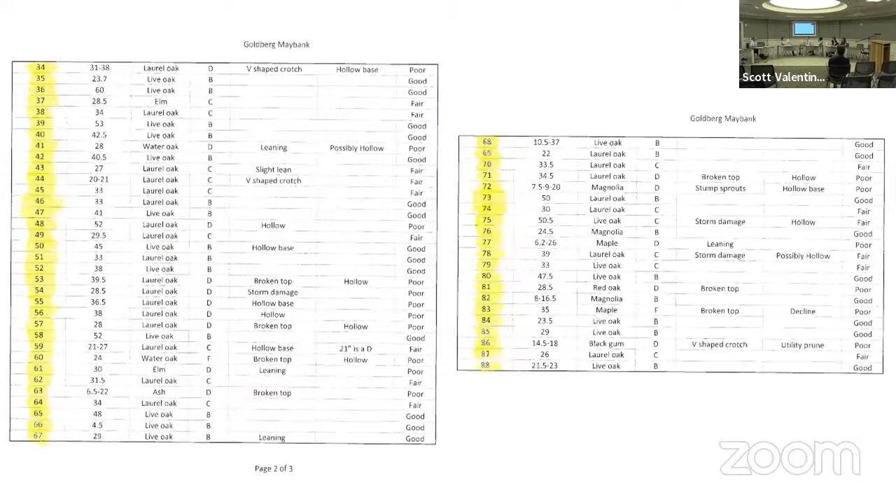So staff recommends approval with the condition to plant 31 caliper inches of canopy trees on the site. Must have a certified arborist submit a tree preservation plan for the protected grand trees to be preserved, and must have a certified arborist implement the tree protection or preservation plan.

Must use 4-foot chain link fence. There's some out there on site already for the road construction, but additional fencing will be needed in 4-foot chain link fence.

Materials must develop the tree save areas into appropriate groomed landscape areas. They're going to be open space now, not remaining natural. They can go into those areas and then provide a landscape, and that open space plan should go to both DRB and TRC for review and approval. Excellent, Eric, thank you.

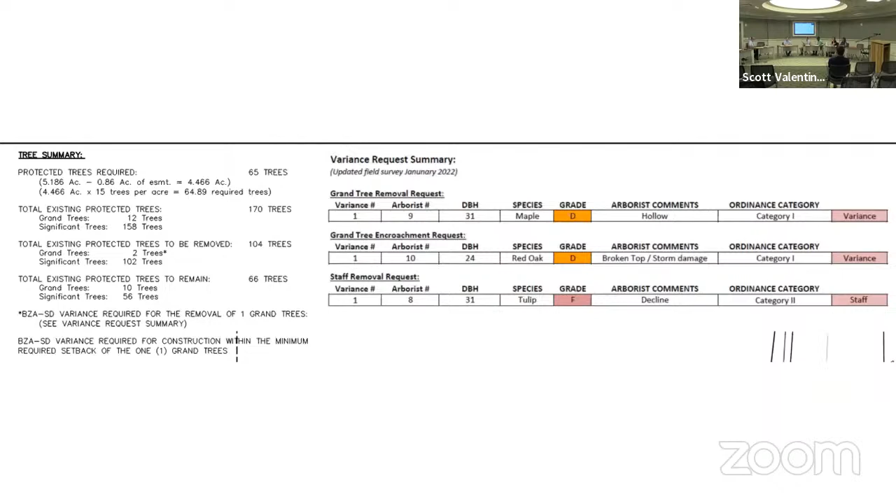Sure, I'm Amy Jacob with HLI, 29A Lineback Drive, Charleston, South Carolina.

Thank you. We deferred from last month's meeting, and as Eric said, we went and restudied the plan and resurveyed the canopy trees, two large canopy trees out along Maybank Highway. In doing that, we reduced the building footprints out of the canopy area in order to give that space, creating a larger green space, open space in that area.

At the same time, we took out two buildings that were in this back area and along this area. What that allowed us to do is shift the parking down and save one of the grand trees, which is the one we're asking for, just a minor encroachment of the curbing. It also allowed us to save more of the protected trees along the property line, which helped bring us back up above the 15 trees per acre.

At the same time, we reduced the parking count from more of an industry standard of 4.5 parking spaces per 1,000, and we're moving to 4 parking spaces per 1,000 square feet, which is the minimum written into the code. There are some other areas we studied, like pulling the parking lot back in this area and saving a group of trees, which again helped us get back above the 15 trees per acre.

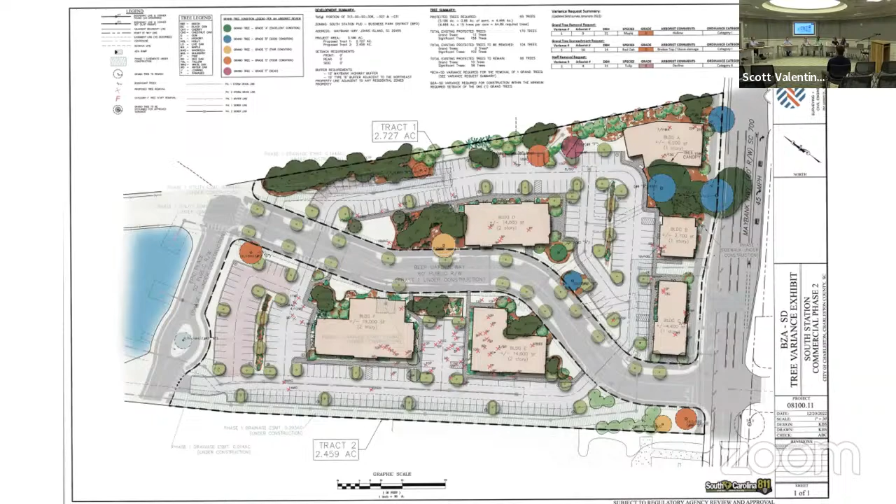I'll start by saying I think it's a great example of city staff and applicant working together, because these plans are significantly different, and ultimately the one we're reviewing today is going to be a much better fit design for that parcel. So great job. And my eye looks at those trees, and I think that's for Jennifer.

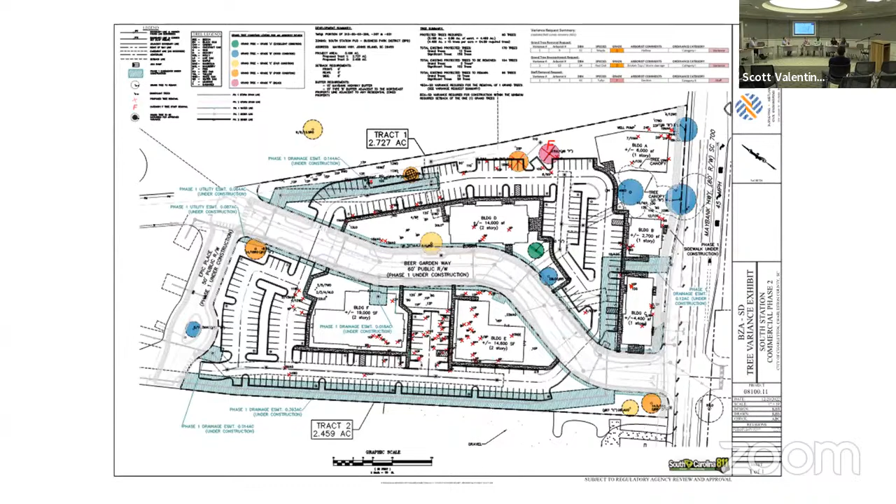I'm curious about the tree she mentioned, the minor encroachment for curbing, what that looks like today. That's the red oak, was it?

Yep, red oak. As you can see in the far right photo, there was a break out of the upper crown, and there's like a stub, which I would hope that we could just have the arborist prune out and kind of restore the canopy.

And in the middle photo, the silt fence is around the back property line and on the plan, so the curb is basically right on the front of that chain link fence. It just doesn't quite meet the full distance.

Do we have any pictures of the root area? I do not. That would tell the rest of the story of the tree. Are you concerned that the roots are up out of the ground? No, I just want to see that it's healthy, because it's graded a D.

And so if the roots and ground are healthy, I would feel better about the encroachment.

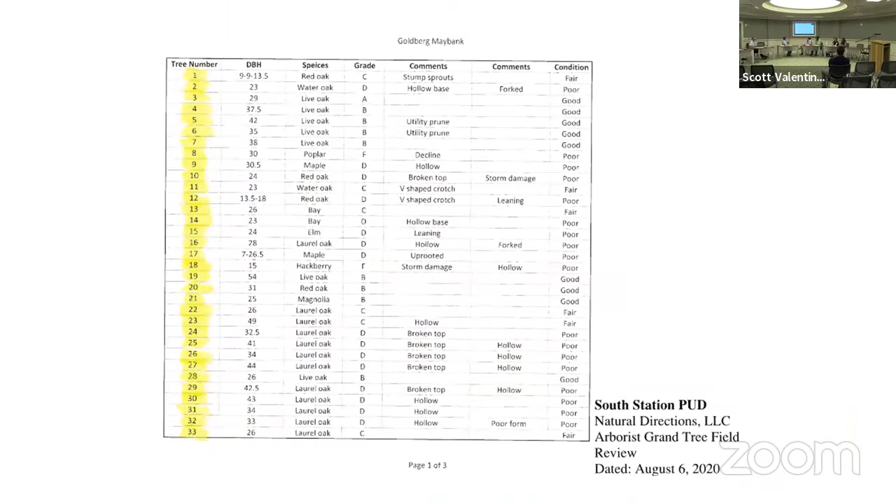How much fill is being run into the road? The road is currently under construction, so as far as the parking lot area we're looking at, we're now studying it. Now that we've opened up this area, we're looking at changing some of the slope and bringing it down, so hopefully we can start to reduce some of that, since that existing elevation is lower than what is being proposed, so we'll lower some of the elevation within the parking lot.

So along with the curb being constructed, there's also a raise in grade at the base of the tree. But in the drive aisle, yeah, in this area over here. Can you point on the plan to what tree we're talking about? This is the tree that's being encroached.

And so with the drive aisle, we have fixed entrances here and here, so in order to get circulation of the building, we have to connect. In doing so, we removed that building and pulled this down in order to save that tree, where our initial proposal was asking to remove it.

And so the curbing that goes there probably needs a small short retaining wall as far away from the tree on the back of the curb, in order to keep the elevation and not promote grading through there.

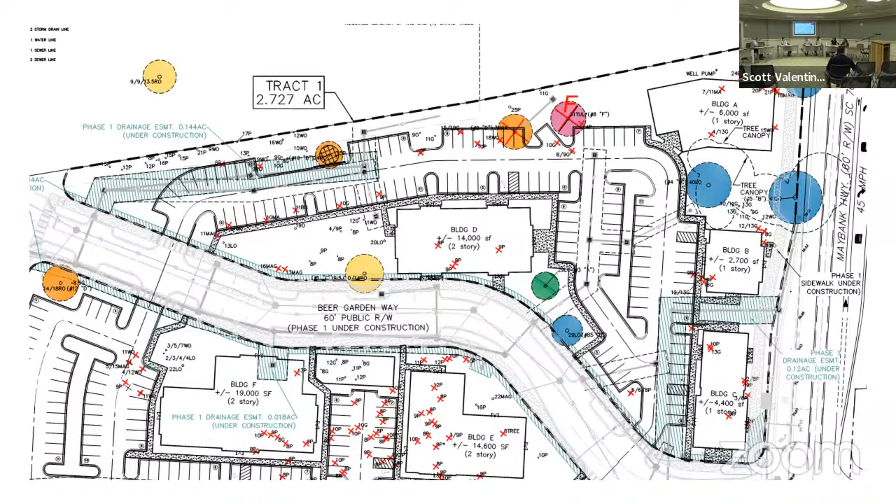The motion, if there's no questions. Make a motion for approval of staff recommendation. I second that motion. All right, so Paula, seconded by Jennifer. All in favor of the motion? Aye. In favor, any opposed? So it's approved. Thank you for your time. Thank you. Approved by. Good. Five zero.

All right, so the next one is, moving along, item D1, for 411 Meeting Street. TMS number is 45909031114. Zoned MU-2. Request for the first 1-year extension of a vested right that expired on 2/3/23, pursuant to section 54-962. Vested right pertains to variances granted under section 54-327 on 2/3/21 to allow the removal of protected and grand trees.

Yep, so this is 411 Meeting Street. Some of you weren't on the board at the time. Obviously 2 years ago they made the application, with that date creeping up on them in January, but it wasn't in time to make the February meeting. So we said that's okay to make that, and they pay the fee. They're asking for a 1-year extension with interest rates and building materials the way they are. The project is moving along. Matter of fact, I believe there's maybe a subsequent development plan approval that would vest this a little further, but they just wanted to be cautious.

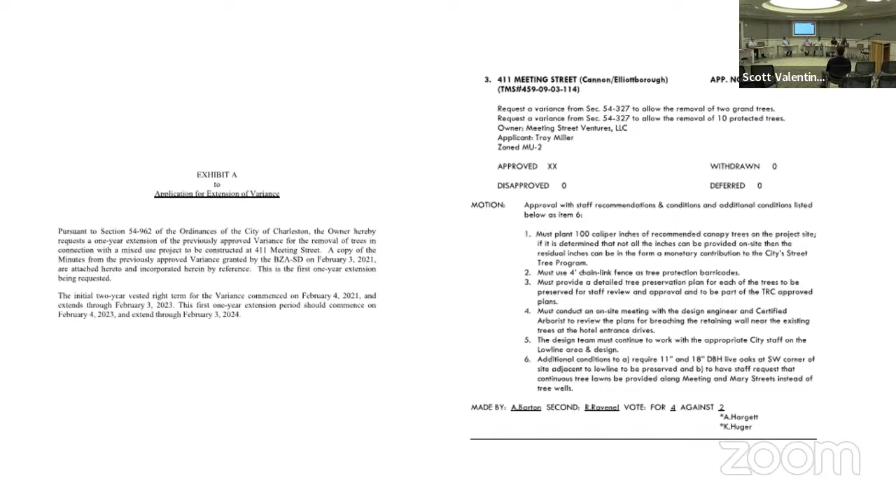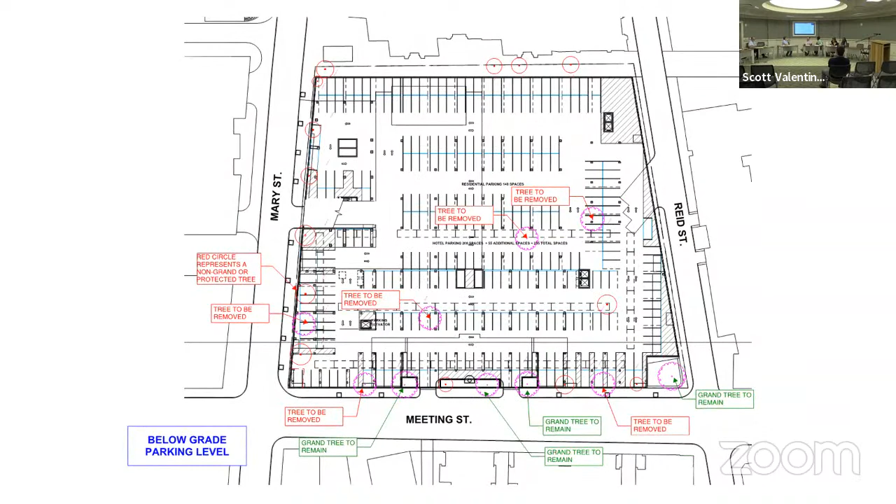The attorney for the ownership group is here. This is the application, this is the exhibit for the extension, as you can see there. Conditions would carry over. The Meeting Street property, zoned MU2, aerial. This is a hotel, conference, residential mixed-use project. This was the city's exhibit we used to clarify, because there was a previous approval and then it came back for additional trees.

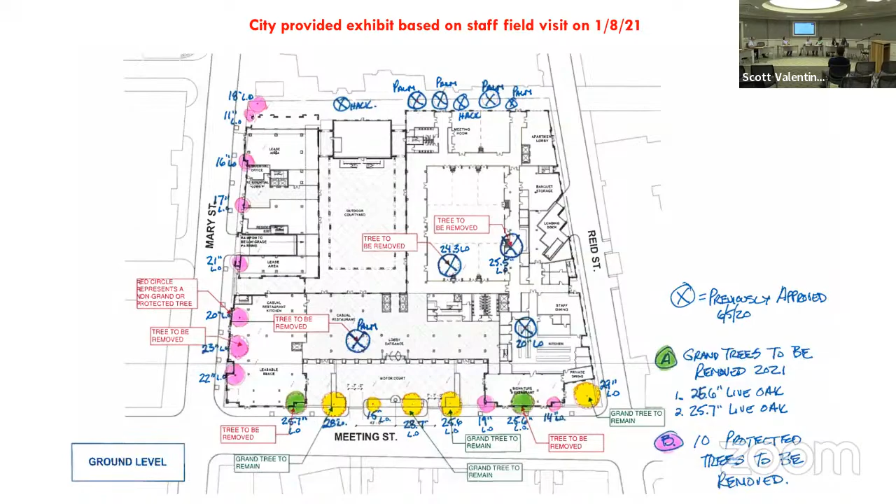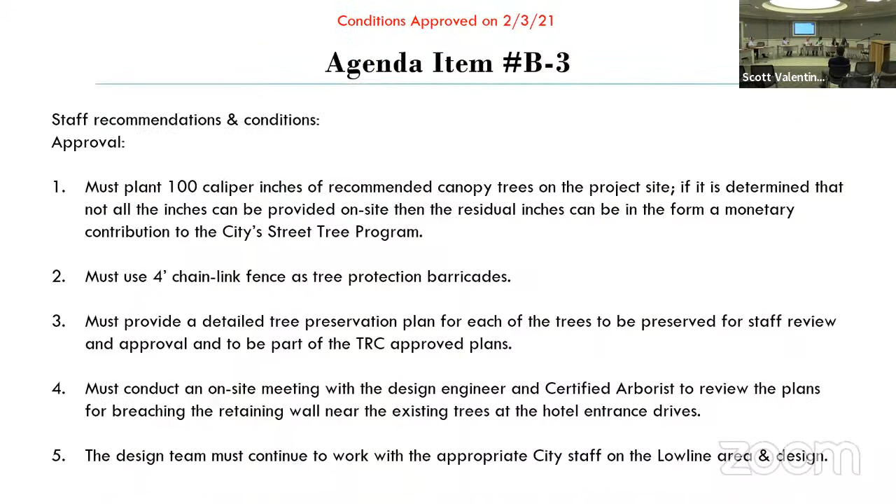The rules have changed. These are the conditions. Staff recommends approval for the 1-year extension. All right, staff is ready. Do you want to stay and talk or mention anything?

I'm James Wilson with Home Fundings at 5 Exchange Street, here on behalf of the applicant, and I'm just here to ask questions in terms of the project moving forward. Planning is to hopefully pull the building permit relatively soon, certainly this year. So we want to make sure that we have this extended, and as Mr. Schultz said, I think we'll probably find a new way under TRC approval, but this is just the intro.

All right, thank you. Anybody else present that wants to be heard in favor? Anybody present that's opposed? Close the application to the public, field to the board. Any discussion? Remember this. Reason to go back and change the decision. Don't see any reason why we wouldn't grant the approval. I remember it very well. I concur.

I have a motion. All right, it's a motion for approval by Calvin, I'll second. Second by Jennifer. All in favor? Aye. In favor, any opposed? It's approved, 5-0. Thank you. Thank you, and sorry, Paul.

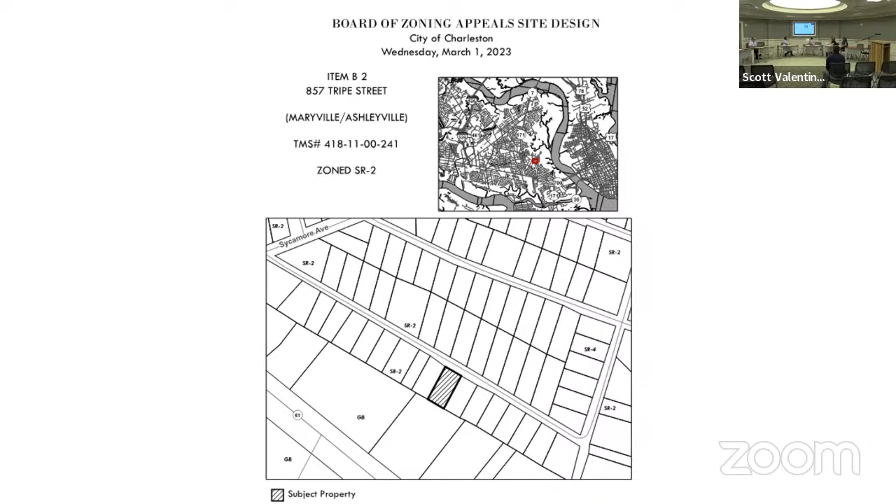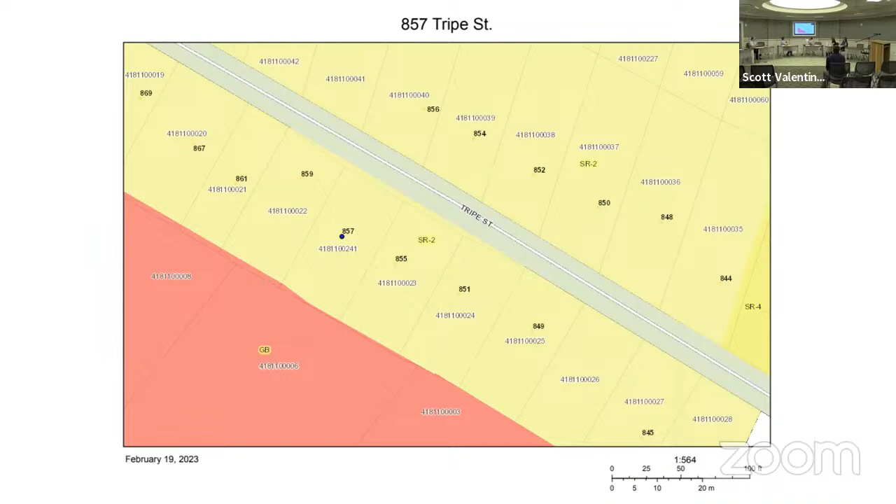So SR2 has similar setbacks as SR1: 25 front, 25 rear, 9 on the sides. See today, I think it was probably a side yard of 8.5 at one point, but not existing now, and I think they pulled the garden and their fence off of that property. You can kind of see that it looked like it might have been used. So it is a water oak, it's starting to break apart, and I'll point out a few issues that I saw, but it is basically inside a couple feet of the rear 25-foot rear setback.

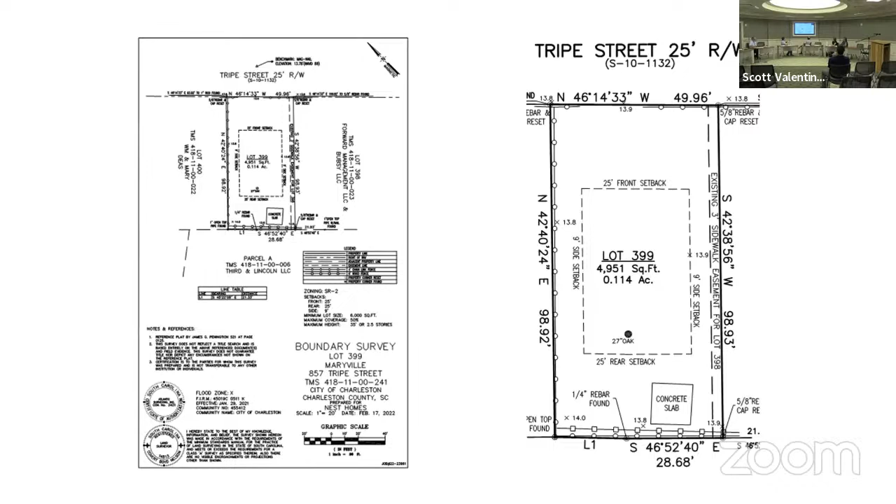So here's your plat, the full boundary survey, and then I blew up the 27-inch oak on the back side there. So pretty much in what you think is the building footprint or envelope. This house, meeting the front, has a little notch for the front porch, and then just a couple feet off the rear for the patio.

National Directions went out and looked at it, 27.5 inch water oak. They gave it a C grade, fair condition.

You can see some branches that have died and fallen out of the tree. Sorry for the light, but there's some damage in the canopy. And then we start to look at the trunk and start to see some what appears to be some cavities, some sort of wound, whether it got struck by lightning or something. They're kind of running down the face of that side of the trunk. And then, of course, you've got some callus wood that developed over some kind of wound at the base.

I don't know if it's starting to, that wrought iron, I think there might have been like a little circular bench around the tree at one time or something that's starting to go off with wrought iron.

But with that said, again, fact-finding function, must plant 13.5 caliper inches of trees on the house site in the form of 2.5-inch trees. I think we can plant one in the front yard, plant one in the backyard, and then the residual inches in the form of 3 trees at 2.95 as a contribution to the city street tree program, and provide a landscape plan for staff review and approval.

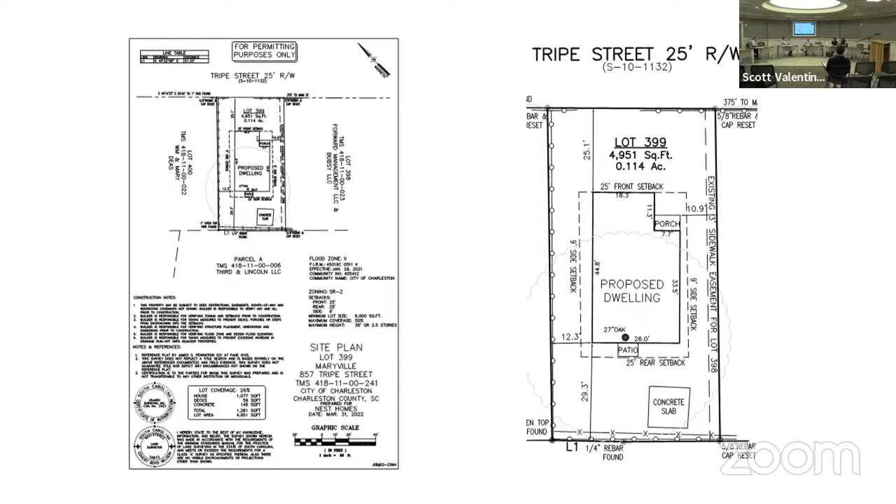It certainly sounded like there were holes. Yeah, so I think it would be a nice thing to plant some new trees with the building of the house.

Questions from the applicant? Any other comments?

So we'll go to item B3. Oh, some water break there.

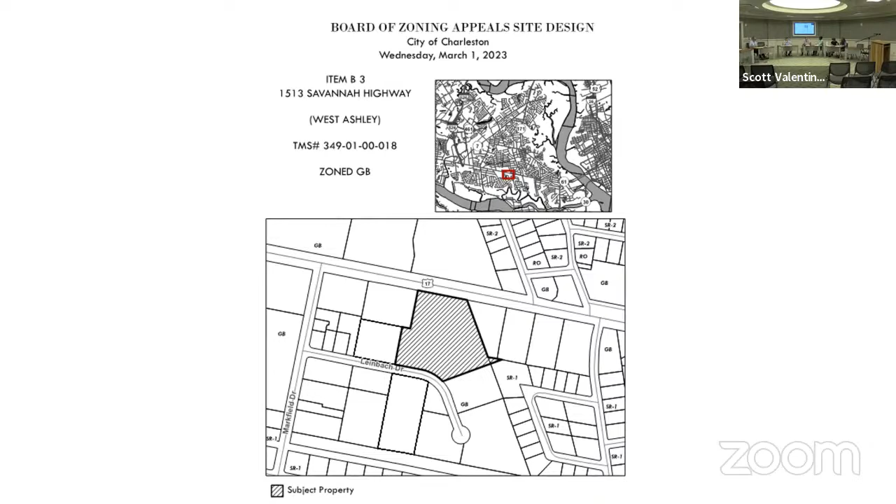Right, so item B3 is 1513 Savannah Highway, TMS number 349010018, zoned GB. Request a variance from section 54-327 to omit the 15 protected trees per acre requirement. So this is the application submitted by Fordberg Engineering on behalf of the Baker Motor Ownership Group. Grounds for a variance. This property does stretch from Savannah Highway to Leinbach Drive.

So focus on the big building. You've got Mercedes and Infiniti showrooms out front, and then a lot of back-of-house operations, the service, repair, car wash. And I believe the Rover West Ashley building will at some point be demolished. But they need to move forward. It's for the two dealerships, and that involves some changes.

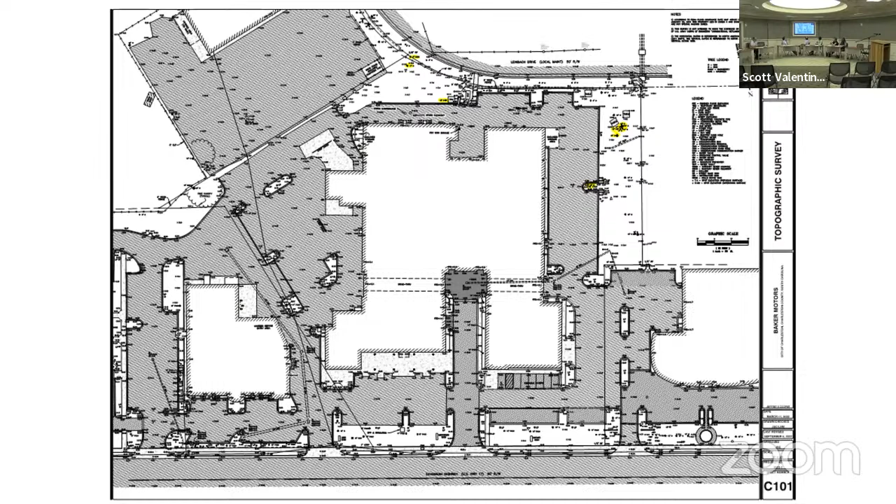So this is your existing conditions layout. You can just barely pick up the property line, but it's kind of like that wedge, if you will, with the flat front on Savannah Highway. Note that where a couple of the yellow dots are, top right, is a green space with a detention area. And it seems that we're seeing more often that dealership real estate is very valuable, and they need every square inch for employee parking, inventory parking, operational type things. So that's existing conditions. So this would be the demolition plan.

They're taking off the front Mercedes building and reorganizing it to have a drive-through service, or porte cochere, if you will. I'll let the applicant speak to that, and then they need to add a car wash and some other elements. So that's the new front, the new drive-through porte cochere, if you will.

You see a freestanding car wash top right, and reconfiguring some parking and a new driveway out to Leinbach, a better organized driveway compared to what they have now. They have to drive through to the other building to the north, very planned. You can see a portion of it, there's a driveway there. So the new curb cut.

So we have a few protected trees, I believe 14 in total, and I'll zoom in on those. We've got 3 where the curb cut is going to be built, and 1 near an existing transformer. And then the others are in that kind of open space where there's a little bit of a detention area, far right.

Again, here's the site plan, proposed landscape. So we'll plug in trees per the interior parking lot requirements and so on and so forth.

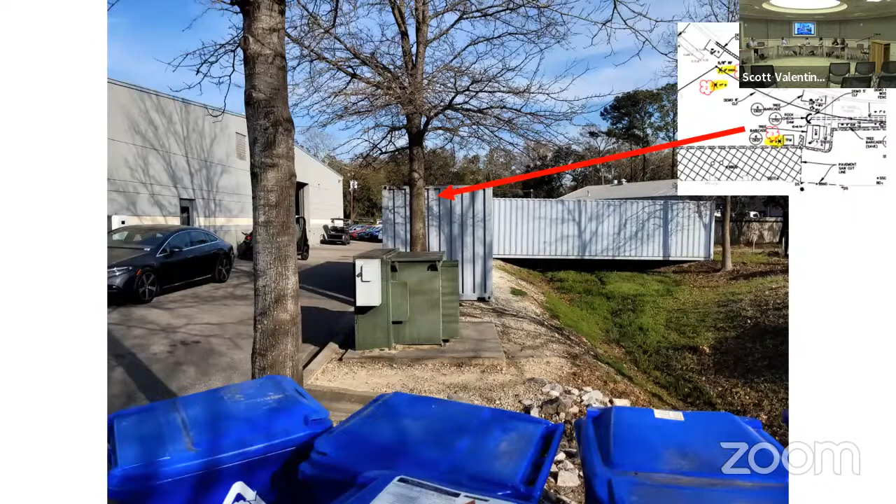That goes away and they put a freestanding car wash in that notched out area in the property. So to make it a little more clear, if you're looking at the plan, you see 4, 5 through 10, 11, 12, 13, 14 - these are the group of trees here. Then this group of trees, the one by the transformer, 2 out near the street, and again, near a detention area.

So stormwater, they're going to have to address - it's probably going underground with our new stormwater requirements. Explain that, but...

So with that said, staff is prepared to recommend approval with 70 caliber inches of canopy trees on the project site or off-site as per below. The applicant must work with the Parks Department and Traffic and Transportation to restore the right-of-way grass and install no parking signs, and to determine if some of the caliber inches can be planted in the right-of-way on Leinbach Drive through the DRC review process.

Along Leinbach Drive they must provide a new fence and/or a combination of canopy trees and shrubs in the 5-foot landscape strip adjacent to Leinbach Drive. And then must provide a landscape plan for both DRB and DRC review and approval.

Eric, thank you. Applicant present.

Good evening, I'm Trey Lenton with Forsberg Engineering, 1587 Savannah Highway. As Eric mentioned, this is already an existing Baker Mercedes site. They are tearing down a portion of the building, adding a service bay on the side, and trying to set up their operations around the site better. And one of those things is to include a car wash that's separate from the building itself.

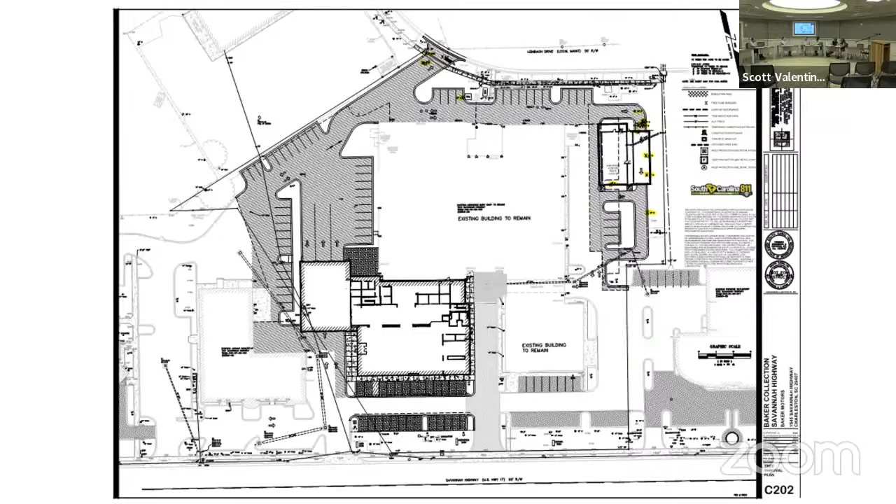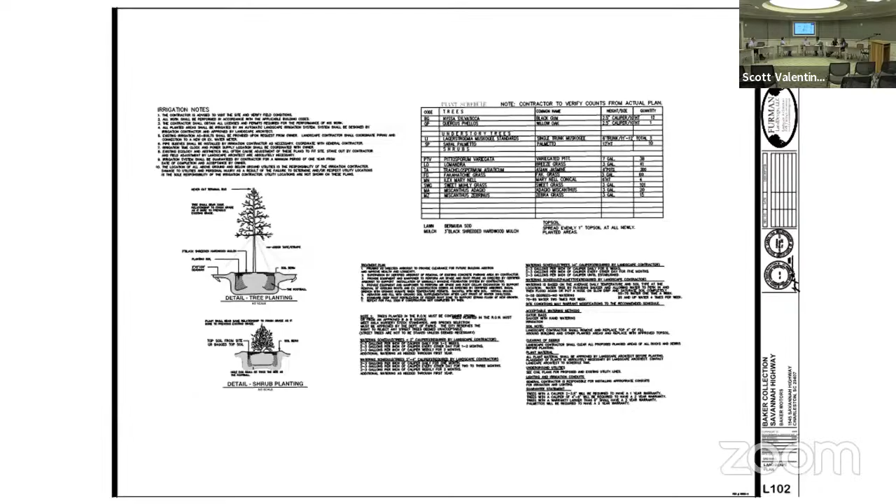Notice all the cars on Leinbach in that photo too - a whole line of parking. I'd say that's probably illegal parking, and it's probably illegal to offload on City Street.

Yeah, so the DRC requires the introduction of sidewalk. We do have a daycare center at the end in the cul-de-sac, so we'll get sidewalk, and parks will be looking at street trees, lights, and we'll restore the turf. And T&T is going to figure out a way to stop the illegal parking on the public pedestrian way.

I'd say no, because I would have an issue. And I failed to mention with the last applicant, but this one as well, we received no written comments through email.

Can you put the information back up? I think his comment number 2 is intended to get rid of the parking that's illegally showing up there.

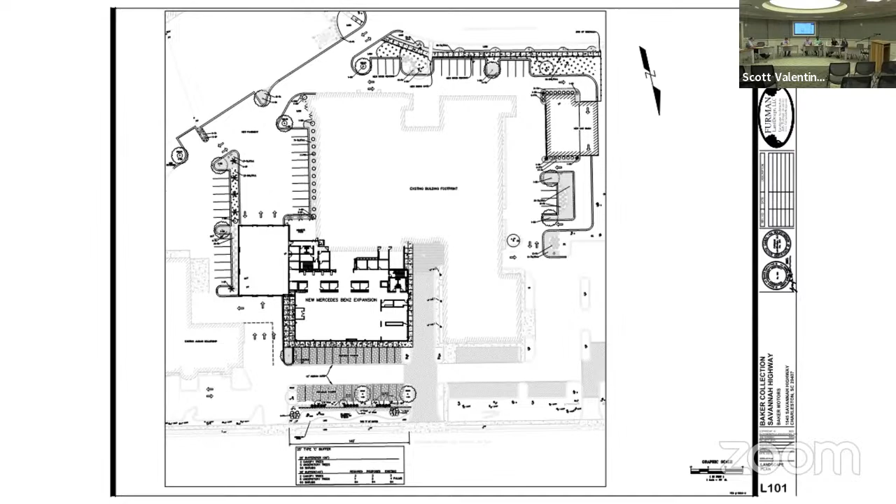Any other questions? Did the applicant meet with the surrounding businesses and discuss this with the adjacent property owners? Discuss circulation, or maybe trees, just in general being a good neighbor. I don't know if they have or not.

I can certainly relay that to them, that regarding circulation and the new access, when it comes to Traffic and Transportation, they should discuss that with their neighbors before they put the curb cut in. But I don't know if they've reached out to anybody at this point.

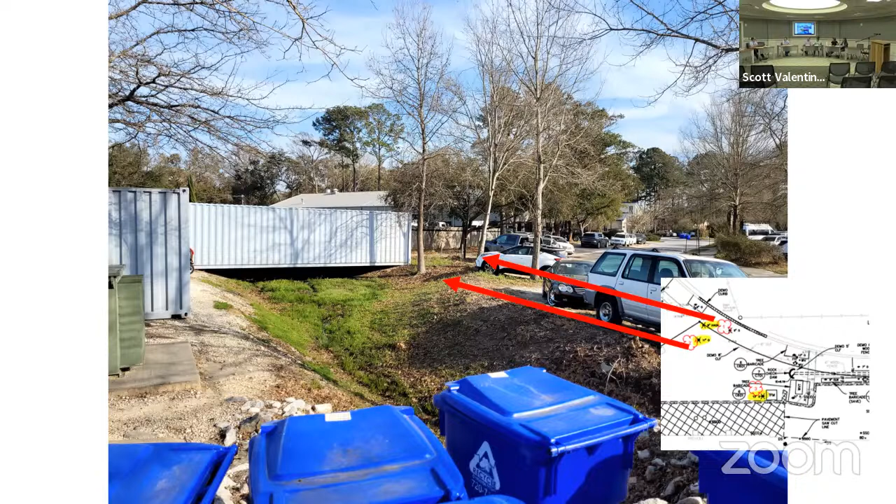Eric was posted on Savannah Highway. I posted on a telegraph pole at the Mercedes entrance, because I couldn't find the address, and they said we're 1511. I said, well, no, this tract is 1513. So I guess Infiniti's 1513, Mercedes is 1511.

Just wondering, there's a section of fence like here, and then it kind of breaks down. There was a fence post right there. I put the blue sign on it, the fence post, where there was a little concrete walk that went up from the roadside. I do have a picture of it right here.

Your comment stated to work with the city to not have parking on that. Yeah, so I sent an email over to Traffic and Transportation, and they basically said we'll work through it, but it's a bigger problem all the way up and down Leinbach. It's not just this parcel.

I don't know how they've been trying to enforce it, whether there's a grander plan. The whole idea of trucks offloading in the middle of Savannah Highway elsewhere is coming to people's attention with the safety issues and what have you. I worded it, but never did get a response from them asking exactly how far I could go. So they have to work with Parks on the sidewalk and streetlights, and with Traffic on the parking signs out there. I'm just suggesting it.

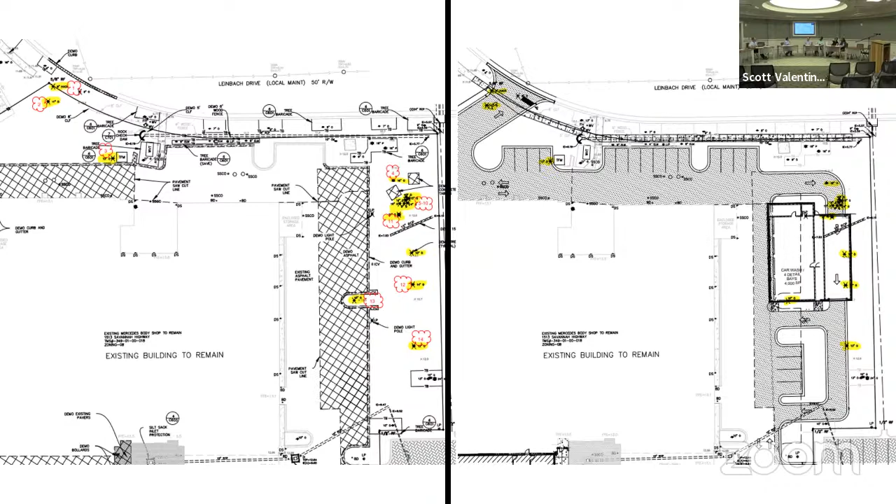They've got the buffer along Savannah Highway. They maintain the 25-foot landscape buffer along Savannah Highway, yes. So the Porsche building is relatively new. I can't remember if the Infiniti was recently renovated, or if it was renovated.

We maintain the 25-foot landscape strip across. And of course DRB will weigh in on pervious pavers and the architecture of the car wash and what have you.

I will make a motion for approval with staff recommendations. Jeff's approval, staff recommendations. Is there a second for Jeff's motion? Or you want to add it to my motion?

Yeah, I can support the motion. I'm just concerned about the gentleman's statement about the parking, but I understand we have no authority in that, so, a second. Kelvin?

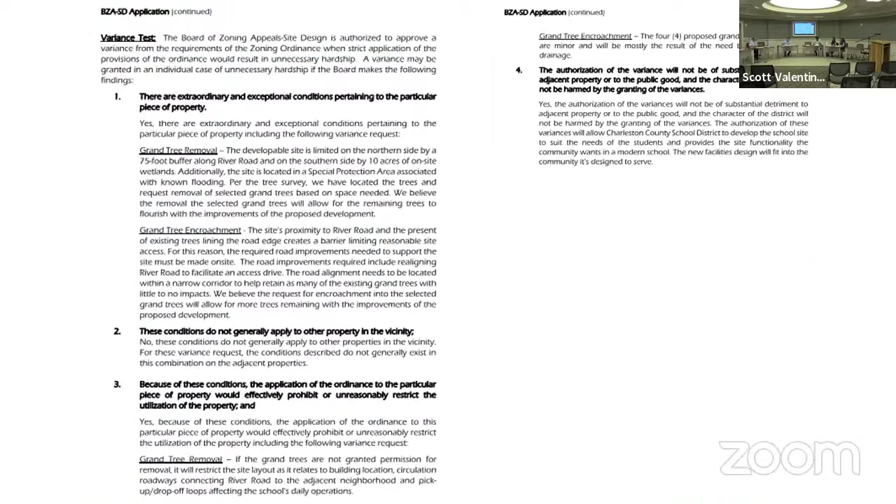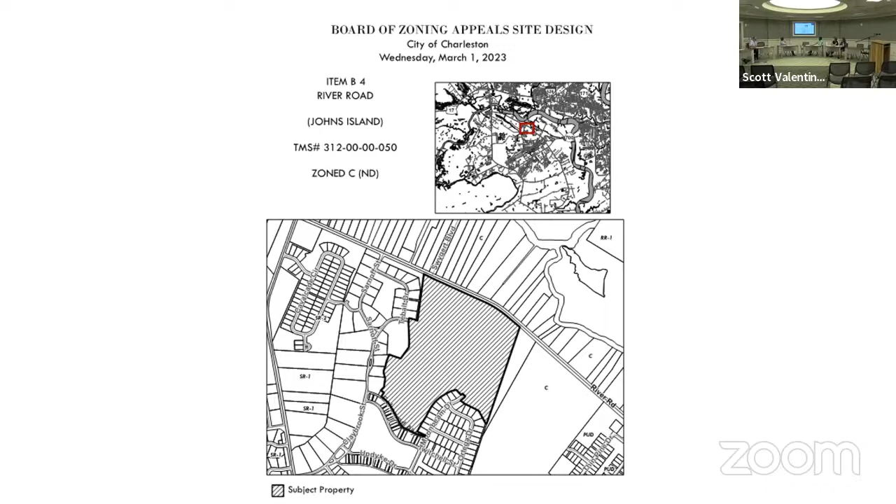Variance test responses. So this is a tract of land that's a residual tract of what was a 200-acre parcel zoned conservation. Under the city's land use regulations, by right you can develop conservation-zoned property as a neighborhood district. So it's zoned conservation, but was developed as a neighborhood district. Under conservation zoning, on high ground, the maximum density was 1 unit per acre, so there was a max of 200 residential units.

I'm getting confused with my TRC review, sorry. I should have brought that slide in, but basically under a neighborhood district you have to provide a mixed use area. It has to meet a certain acreage and so on and so forth.

So they produced a master plan probably 15 years ago now, went through city council, and then slowly developed phases of the residential. You had to have some varying lot size, so these are like the estate lots here, near the Brownswood Road entrance - the larger estate lots. Then you have the more typical residential lot, which became a little larger over here. We finally made a connection to River Road, and planned a connection to this tract of land, which was vacant at the time, through here. The master plan showed a loop coming around, labeled as mixed use.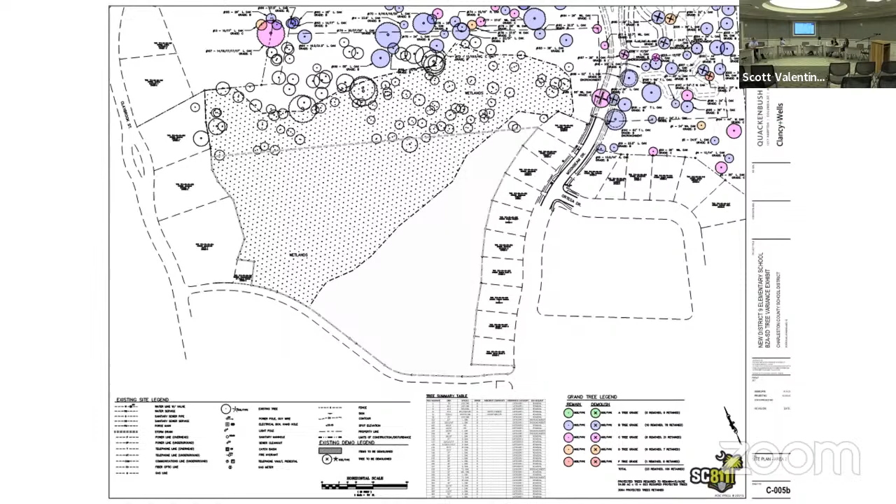So this is the entire list. I uploaded a number of photos, but I have these for you to look at specific trees by number. I'll show the audience and the members present a few of those—I just didn't have time to upload every photo.

So you see how we're going to maintain some really nice live oaks along River Road. Otherwise, they probably would have been sacrificed, since it has a pretty deep roadside swale on the south side of River Road, and to fill that and pipe it with left and right turn lanes would have been a disaster.

So moving down, blowing up into the school area—one's at the front door, one's in, again, grades. The 3 trees that you see there are on an existing ditch, and again that's with the grade falling from the school and the road grade.

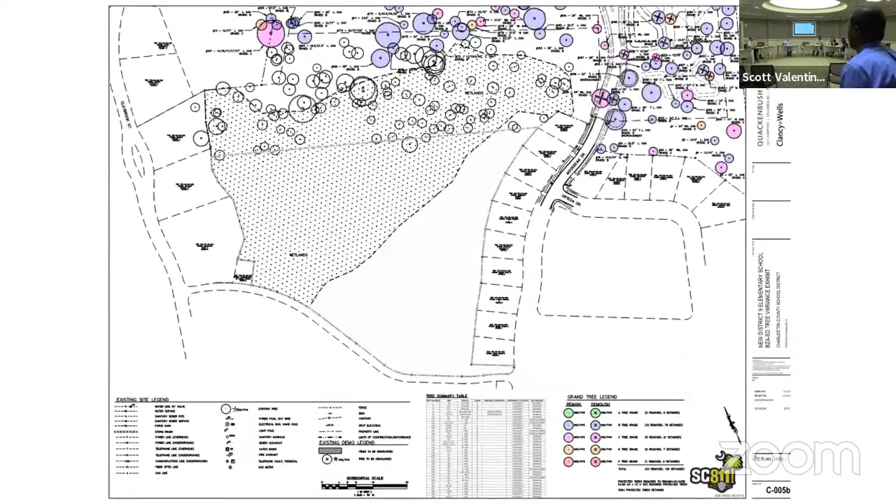Hello, I'm Sebastian Davis with ABC Engineering on behalf of Charleston County School District for this particular project. As you all saw, this is approximately just under 55-acre site. It approximately has thousands of trees. I want to say I think we're retaining just over 3,000 trees. Of those, I think we're retaining just over 100 grand trees that were surveyed. There are obviously more grand trees in the wetlands that were not picked up, that are outside our impact area.

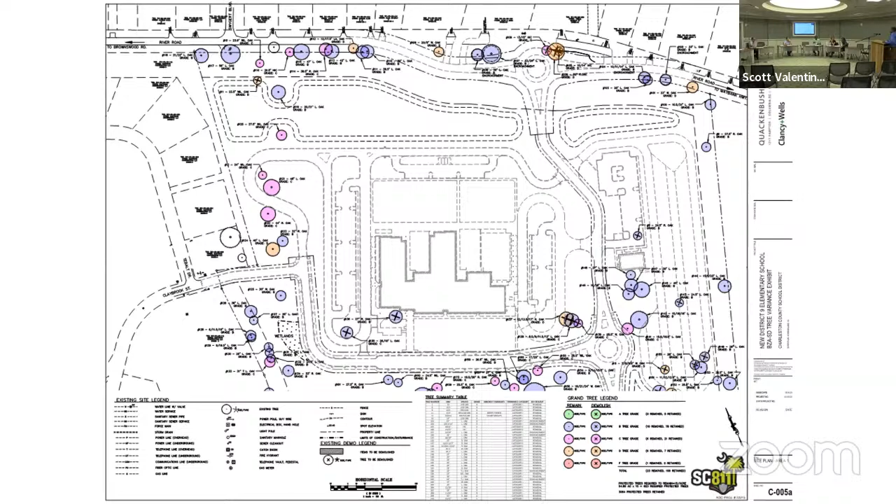To reiterate what Eric mentioned, the circle up towards River Road was suggested to bring internal to the site to save those trees along River Road. As most of you all probably are aware, turn lanes can create a very big impact on the surrounding area, and specifically trees along River Road. So we felt it was better to inset that circle, working with DOT on how we can best shift that circle and connect back to River Road.

So we provided very gradual transitions on either side of the circle to help mitigate any impact we'd have on those trees. So we took very, very good care in looking at the trees that were there and how we could best place that circle to not impact too much the neighbors, but also save as many trees as possible. So that was one strategy.

The second strategy was to try and keep our development very compact to the center of the site as much as we possibly could, to stay away from as many trees as we possibly could. And then we took another strategy - the next step beyond that was trying to realign, whether it was shifting left or right, north or south, to move the circle one direction or the other internal to the site, to try and keep our impact low to the bus parking to the right.

And I think the original application said 28 trees, but with the city's recommendation, we brought that down to 23 trees, and that should be on the exhibit currently that you're seeing.

Just a little bit of a directional, the building sitting more in the center of the site. On the plan left is the car loop.

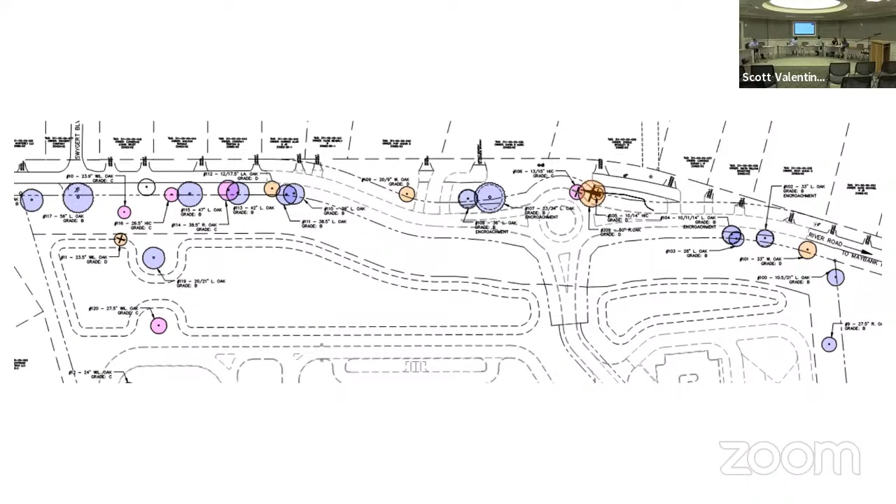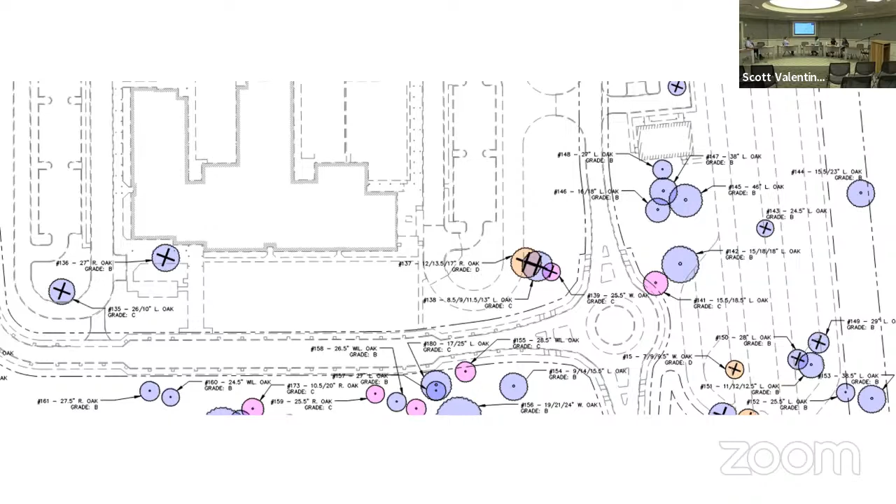And then tree 5 is the one in the pond. Correct, on the outskirts of the pond, I guess for grading reasons. Tree 33 is liable to tree 5. The other ones are up there.

So tree 5 is a yes? Well, that's up to you, that's not part of my condition. Right, Eric's, that was it. So we'll say tree 5 along with tree 1 - let's have our cake and eat it too, and make this work.

Where's 206? 206 is this bottom one here. So the road will just continue straight and hook up with this curb line and then wrap up, so this drive aisle goes away. We're going down here - those 3 get saved right there, and then there's 2 on the top of the sheet. And then this is the one in question.

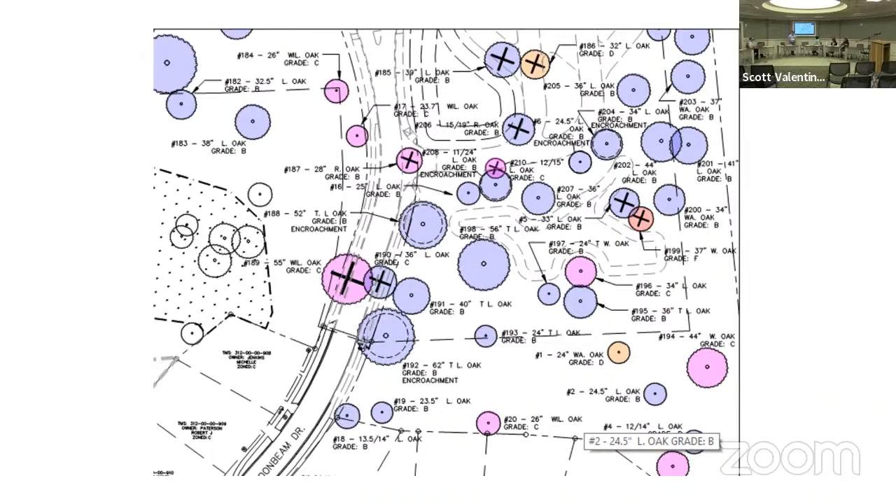Where is 186? The orange tree, that one. I don't know that we necessarily need to save that one. I would almost feel better about leaving more room for the other trees on the other side, like maybe not curving around as much, to afford more room for 150 and some of those other trees. Which one is that? That's the one here - that's the D grade tree.

So maybe, would you be okay if we cross that one out for it to shift over a little bit more to afford more room for 150? I think what the applicant described is - this is a drive aisle, this is a drive aisle, this is a drive aisle, so you get almost on top of this road. There's a little bit of wiggle room there to realign, since they've got to get back over for that tree up there.

But as far as turning radius and everything for the buses, does it work out, or would it work out? To be honest, I think we worked with the project arborist and just slightly impact 150. If we can keep that everything at plan east grade and not have a wall, we're going to have to figure out how to just keep that side of the bus lot pretty much at grade.

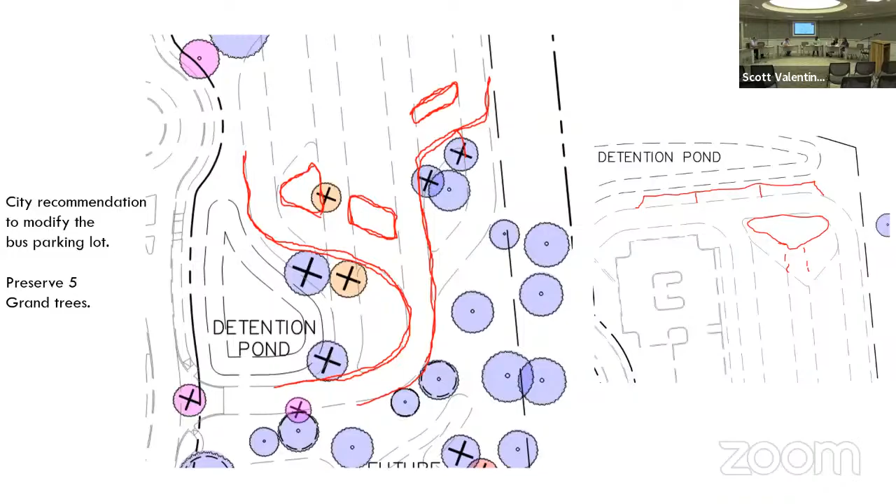I can support that motion. Second. All right, motion for approval with staff conditions, adding tree number 5 to be saved, by Jennifer, seconded by Paula. All in favor? Aye. Any opposed? It's approved.